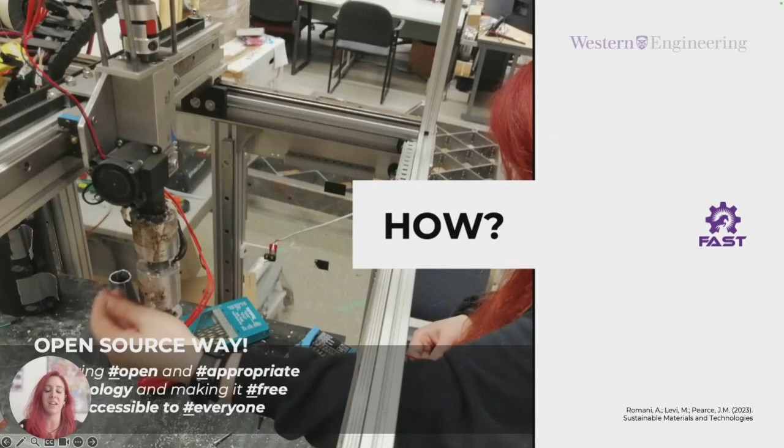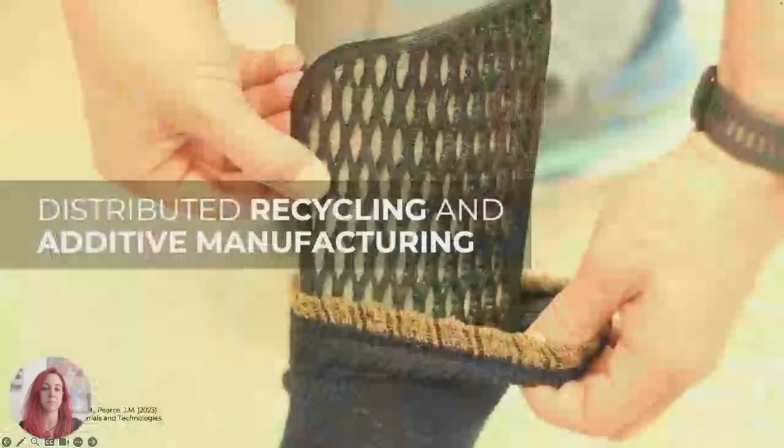But how are we making it possible? In our case, open source is the way. So we are pushing open and appropriate technologies and trying to make it free and accessible to everyone, fostering sustainability at different levels. We are currently involved in projects mostly connected with two main research streams. The first one is distributed recycling and additive manufacturing, which is also my core topic at FastLab. And the second one is focused on enabling sustainable energy and technologies, such as photovoltaics.

In both cases, our focus is to achieve sustainable development goals thanks to accessible technologies, aiming to foster sustainability in real-life contexts. At FastLab, my activities focus on applying open design principles to physical products and studying sustainable materials for accessible product application. All of this thanks to digital fabrication.

You can find us in the Thompson Engineering Building at Western University as part of the Faculty of Engineering, and we are on the main campus in the city of London, Ontario, in Canada. If you want to know more about our work, you can also check our Appropedia page with our projects here.

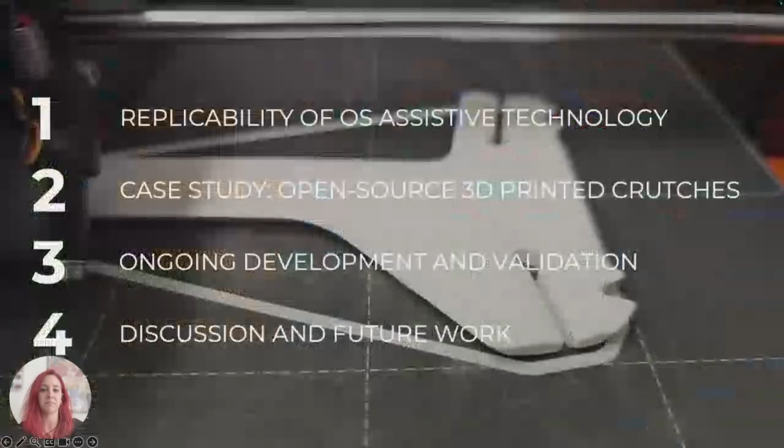Today, I'm going to focus on a specific project connected to the topics of this conference and open source healthcare. First, I will speak about the replicability of open source assistive technology. I will then focus on a case study that we are working on, connected to distributed open source assistive technology products. I will also share some insights from the ongoing development and validation of this project, followed by some key aspects connected to replicability and future work on the projects as well.

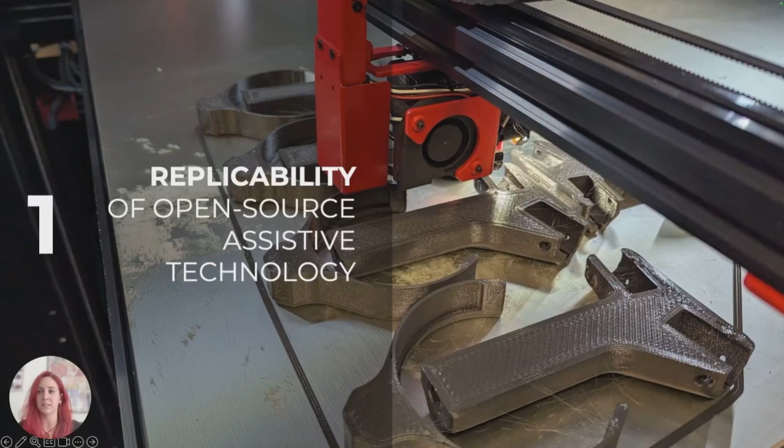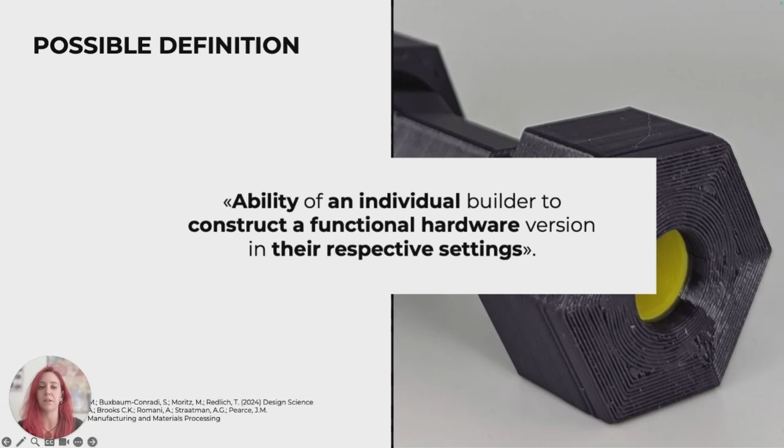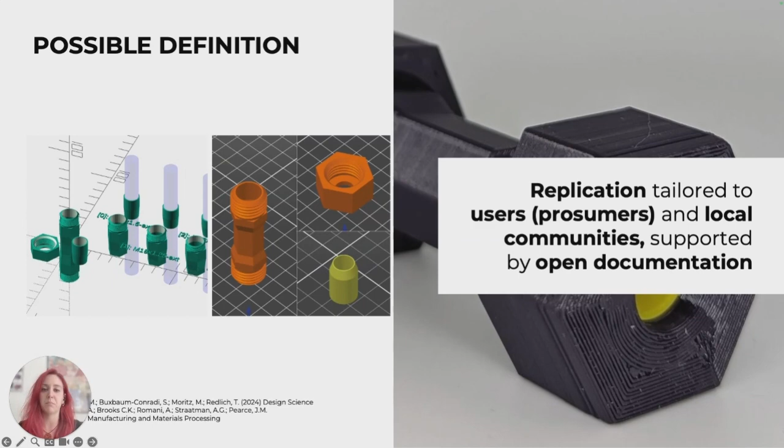Let's start from the replicability of open source assistive technology. But what is replicability in the open hardware context? A possible definition could be the one provided by Omer and colleagues. So replicability is, in this context, the ability of an individual builder to construct a functional hardware version in their respective settings. And this means that the replication should be tailored to users who are prosumers in this case, and local communities as well. And all this process should be supported by open documentation of the designs.

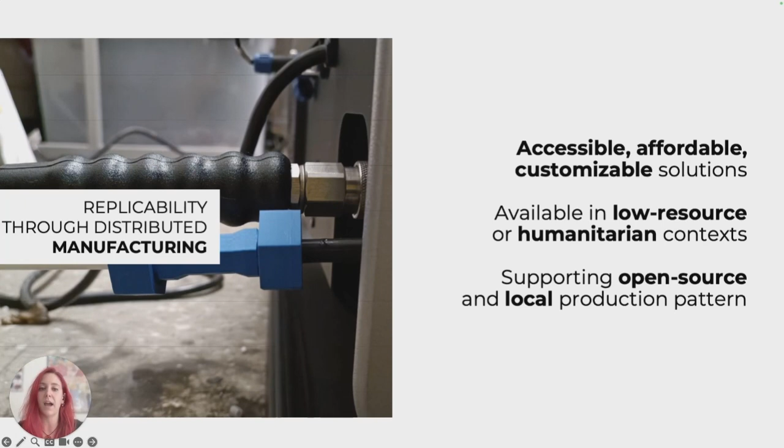Replicability can be achieved thanks to distributed manufacturing because processes such as open source 3D printing allow for more accessible, affordable, and customizable solutions. They can also be available in low resource or humanitarian contexts, for example, having access to a low-cost 3D printer or locally available materials. And all these technologies and materials can support open source local production pattern, producing what is needed and only if needed.

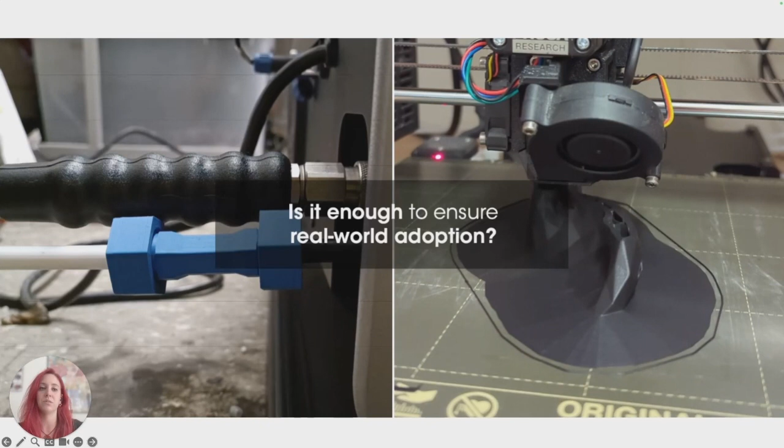Replicability is also fostered by open design principles. Project and documentation for open source products should be available to all users. Those products should also be replicable by using accessible equipment and tools available to users. Finally, the replication of these products should always be possible, together with the adaptation or modification according to specific needs. So the question is mostly if this is enough to ensure real-world adoption.

And I would say no, because open source hardware and products should also consider other factors when reaching users and real-world contexts. For example, easy replicability, quality assessment, or affordable fabrication, and not only the use of open design principles. And here is another big question: what is replicability when applied to the open healthcare context?

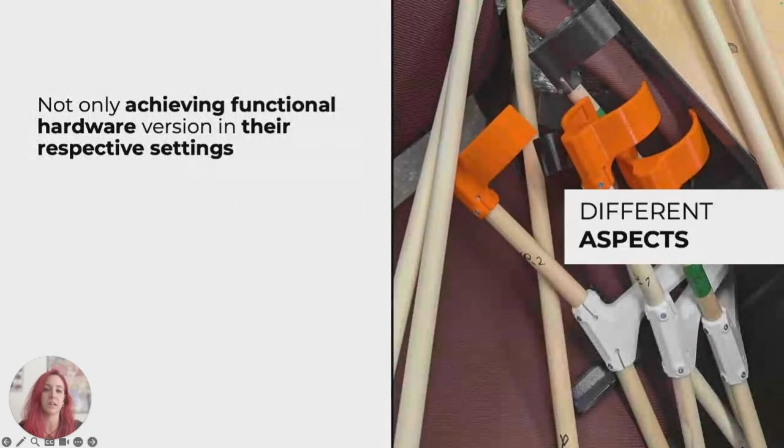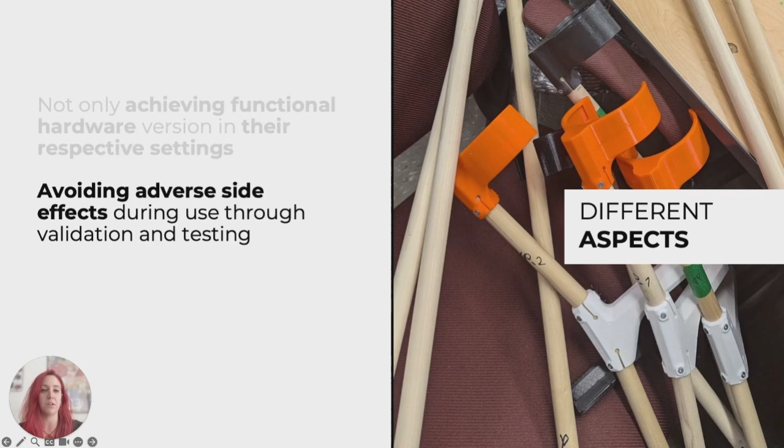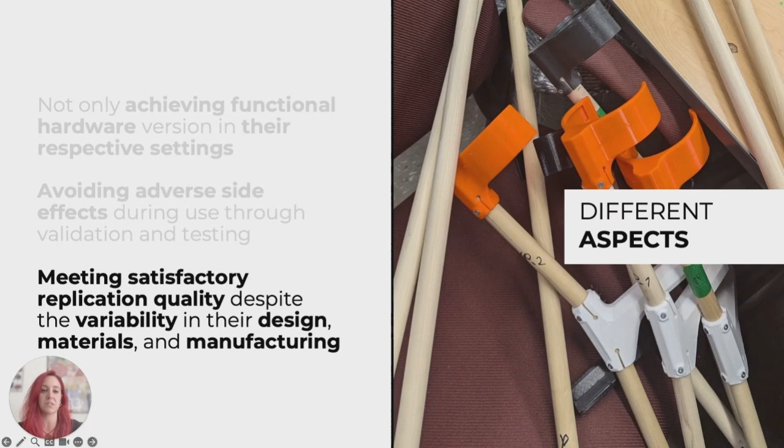This definition might be trickier to define than the previous one, so there are different aspects we should consider. The point is not only achieving functional hardware version in their respective settings, but also avoiding adverse side effects during their use. This can be done through validation and testing of the device and its replicas. We should also meet satisfactory replication despite the variability embedded in distributed open source products, such as modifications in design, variability in local materials, and manufacturing processes. This is also still a topic for real-world adoption of open source assistive devices.

So today's aim is to reflect on the replicability challenges existing in distributed open source assistive technology, and I will do this through an ongoing case study from our lab.

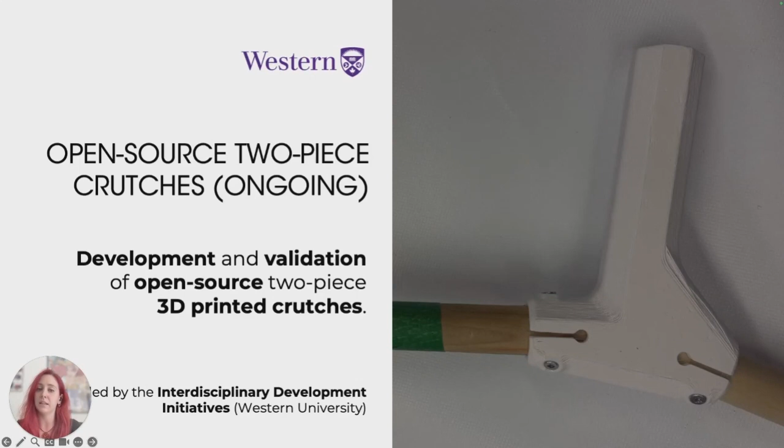This project focuses on the development and validation of a version of 3D printed forearm crutches, funded by the Interdisciplinary Development Initiative at Western University. Our lab is currently working together with other departments and groups at Western, merging each collaborator's expertise and knowledge to foster the real-world application of such an open-source assistive product. I really want to thank them for all the participation and engagement they are showing in this project.

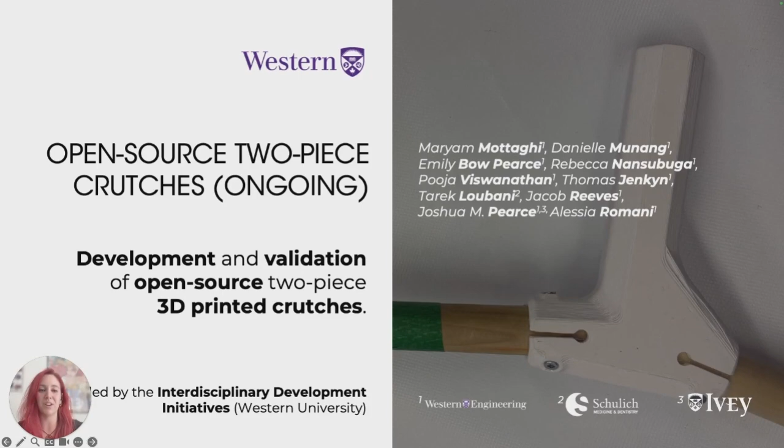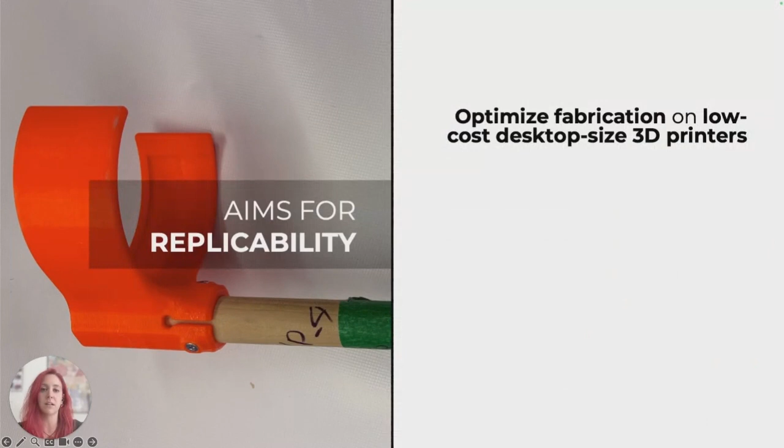What we are aiming for is to develop an open source 2-piece 3D printed crutch that should be replicable in low resource settings and in humanitarian contexts. For this reason, we aim to achieve some replicability goals.

The first is optimizing the fabrication of this product on low-cost desktop-size 3D printers to reach a broader audience of customers. The second is to reduce the need for off-the-shelf parts and make this product less influenced by the availability of such components.

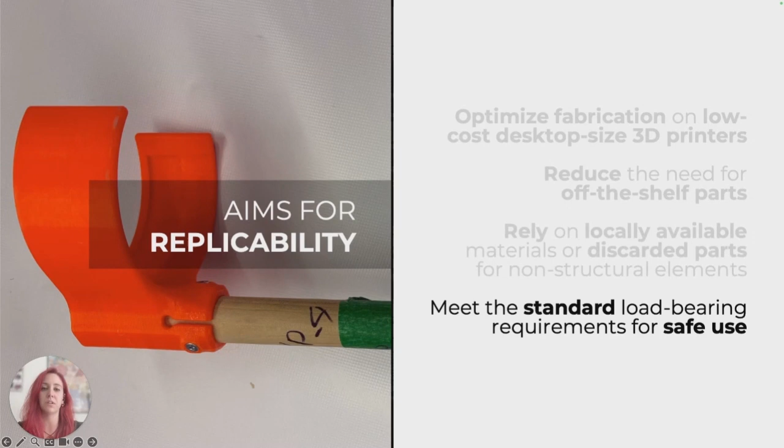The third is trying to rely on locally available materials, or even better if possible, discarded parts for non-structural parts of the product. Finally, we aim to meet the standard load-bearing requirements for safe use of standard crutches, paying attention to safety when the user is using this device.

The development workflow can be divided into different steps. We designed the first version of the crutches during the first design phase, and we optimized its fabrication as a second step, reducing time and material use.

We then tried to study the replicability of these parts by considering different materials and 3D printing setups. We assessed all these different combinations through mechanical tests, which were useful to improve and further modify the design, making it safer and suitable for use.

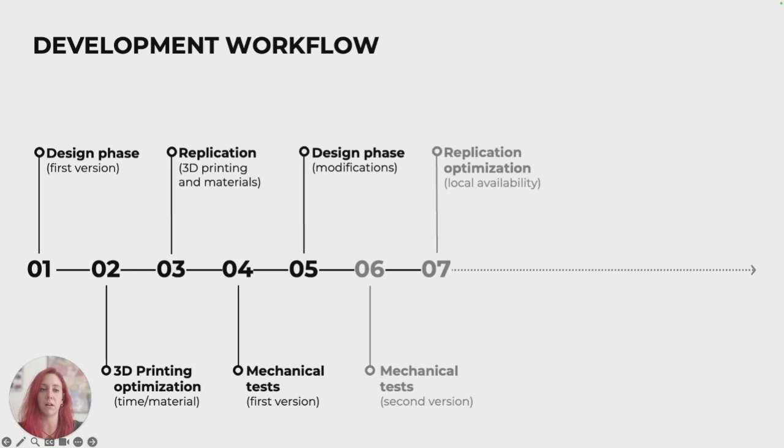Now we are trying to replicate the mechanical tests on this new version, keeping the different combinations of materials and setups, and at the same time, we are working on alternatives to some less available materials or more affordable options.

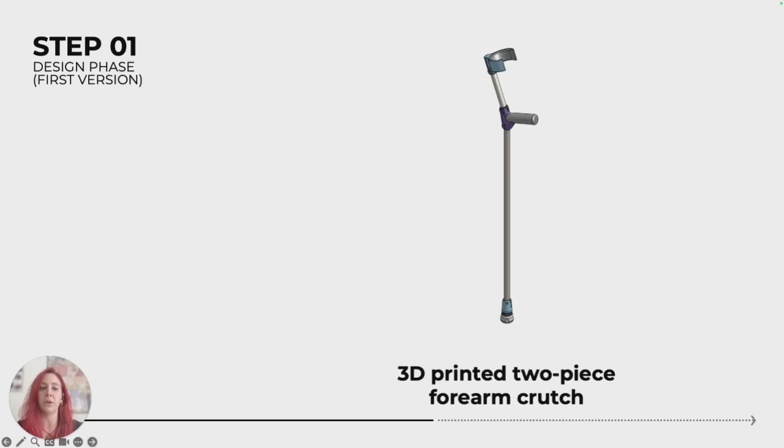Focusing more on the development and validation of the crutches, we are working on a version made of a 2-piece 3D printed forearm upper element, to facilitate the replication of the 3D printed components with low-cost 3D printers. The assembly can be divided into different components using 3D printing for most of the parts, either with rigid or soft materials, and only a few extra off-the-shelf components.

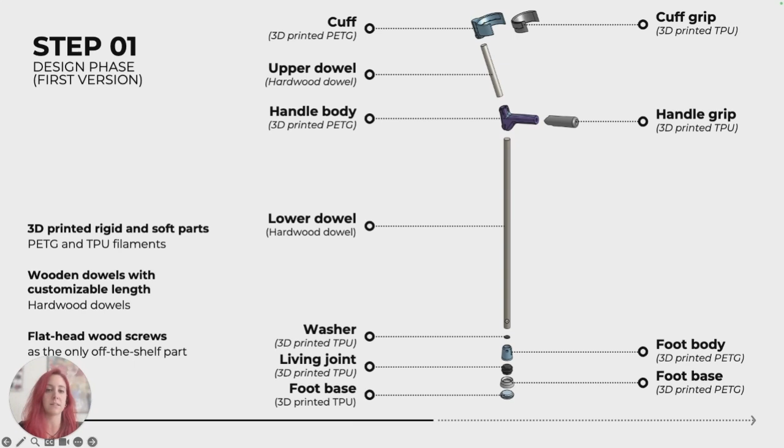We included parts made of PETG and TPU filaments for rigid and soft parts of the product, and then we selected wooden dowels as the main connection parts, allowing for customizable lengths, and added wood screws for the assembly, the off-the-shelf part included in this product.

All the 3D printable parts fit the volume dimensions of desktop-size 3D printers, making the replication easier for users with small format 3D printers and, at the same time, allowing for multiple part 3D printing if using large format systems.

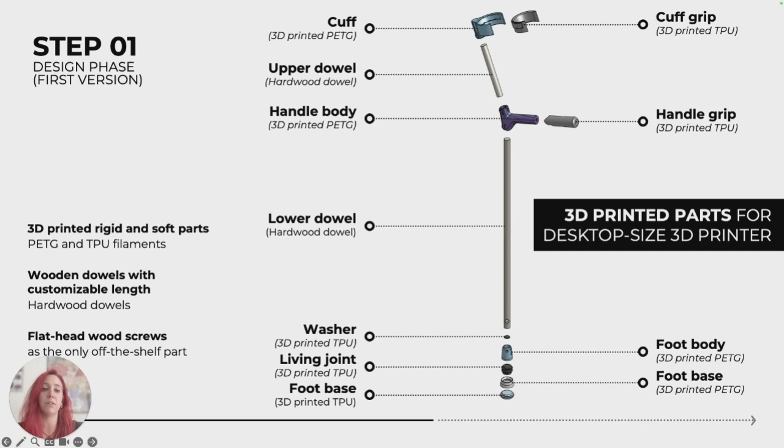The second step was then optimizing the 3D printing settings. What we did was print full solid parts made of PETG to ensure the mechanical requirements we needed for safe use of the crutches. We also considered other aspects during the previous phase, which we checked when printing.

First, we avoided the use of supports thanks to the designed shape and selected building orientation. We also tried to suggest a preferred building orientation through the design shape of the 3D printed component, for instance specific flat base areas or similar aspects, adding a further way to control replicability and guiding the user.

On one hand, this was also useful to reduce the time used for printing the different parts, the material used, and the waste. On the other hand, these choices make the part easier to fabricate by non-expert users.

Then we also tried to work more on the replication aspect connected to the 3D printed parts, and we considered using different materials, filament and qualities, and also different 3D printing formats.

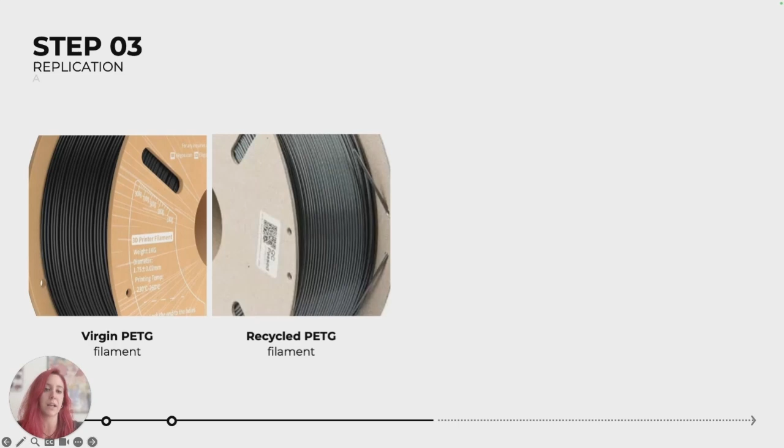What we did was select one material for the structural components, PETG in our case, and print them with both virgin matte filaments and recycled ones. We did this either with small-sized 3D printers, such as Prusa MK3S, and large format 3D printers with building plates suitable for printing multiple parts at the same time.

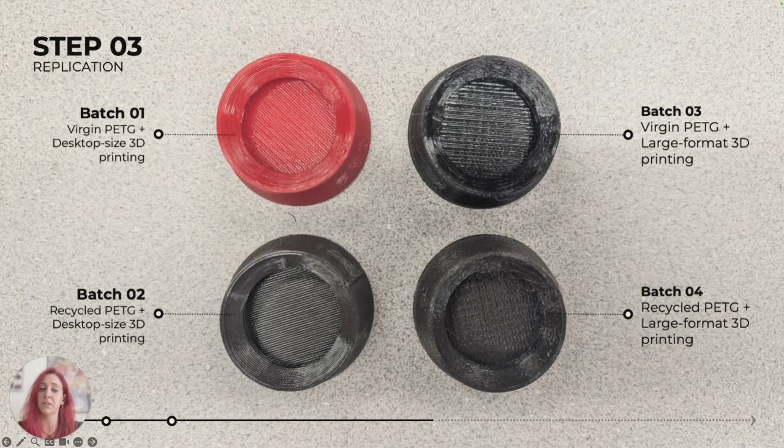These trials resulted in 4 different batches of samples, where batch number 1 uses virgin filament and small-scale 3D printers, batch number 2 switches to recycled PETG, and the other 2 batches focus on large format 3D printers, where batch 3 uses virgin filaments and batch number 4 goes back to recycled ones.

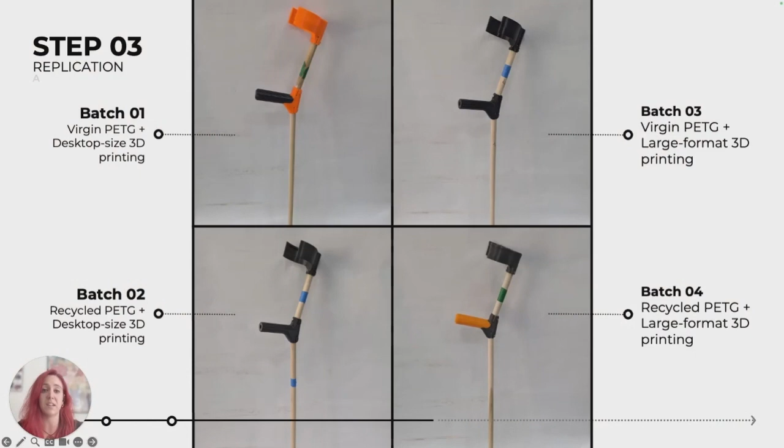These parts also correspond to 4 batches of assembled crutches that we assembled to refine the assembly procedure and perform mechanical tests on this version.

We first referred to the right standard for the test, and we selected the ISO standard available for walking products to be used with one arm.

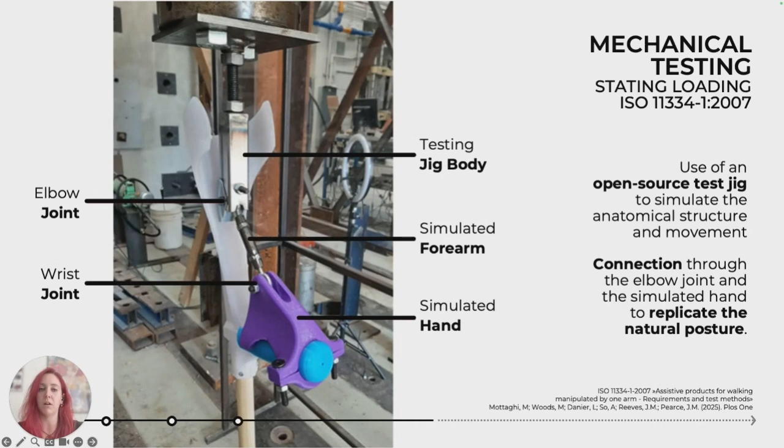We then used a custom setup to simulate the anatomical structure and movement of the arm. This setup was previously developed by our lab in another publication, and we adapted it for our current configuration of the crutches, replicating the natural posture during use thanks to simulated joints of the forearm.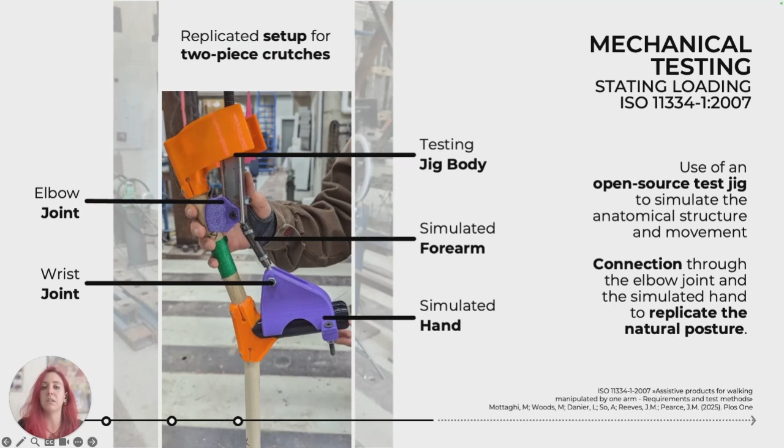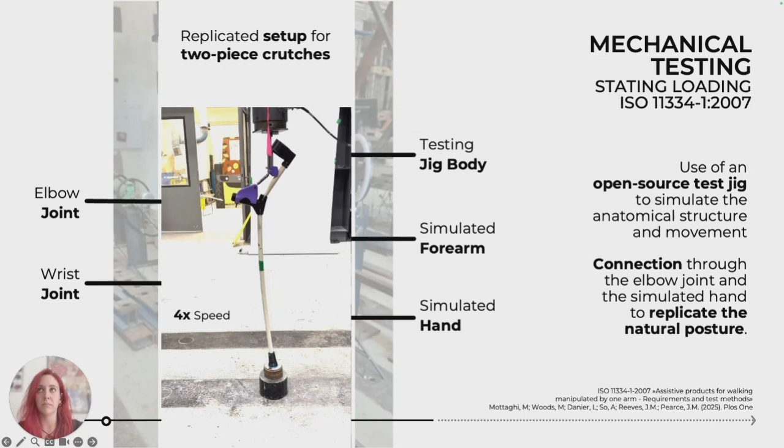We then started to test the applied and increasing load, as you can see from the video. We did it for each of the 4 batches of samples that we have, which means 5 crutches each, so we tested around 20 prototypes in total, trying to reach the maximum load.

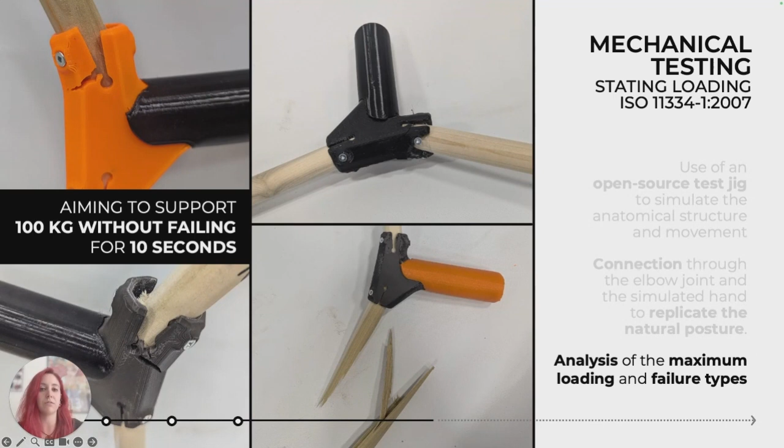Doing this, we also analyzed the maximum load achieved by the different materials and 3D printer combinations and the failure types, which were quite different for each batch, but should ideally meet the standard. So we aim to support 100 kilos without failing for 10 seconds to meet the standard.

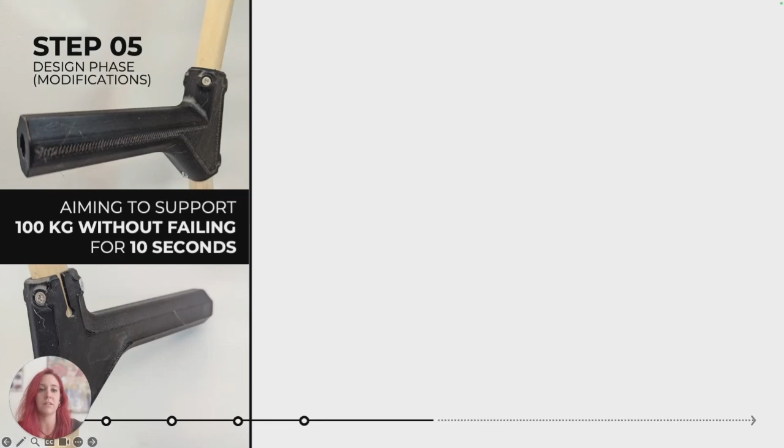These results allow us to make further modifications, which first means modifying and redesigning the critical components leading to failures - in our case, the handle - to achieve the target standard, so 100 kilos without failing for 10 seconds.

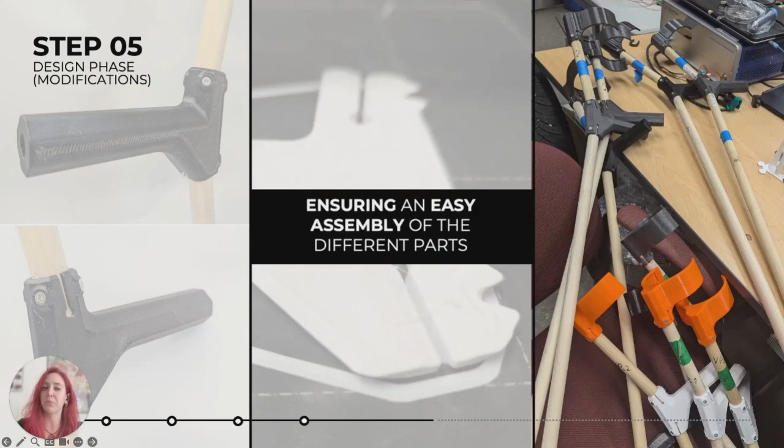We then reprinted the new parts and further tuned the parameters to reduce any inconsistency in the material flow and ensure 100% solid parts. Finally, we reprinted the parts with virgin and recycled materials using both small and large format 3D printers according to the previous batches.

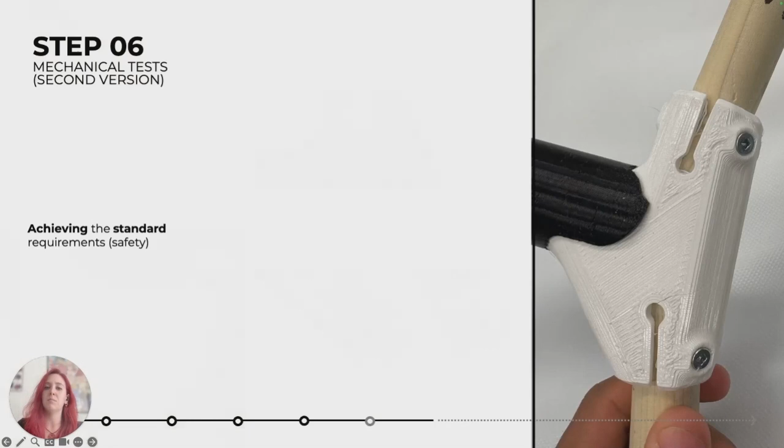We are now doing the mechanical tests on these new prototypes, and they look promising because we are getting to the standard requirements for safety, and the replicability of our part is good because we are observing similar failure modes on the samples, which also highlight some patterns supporting replicability.

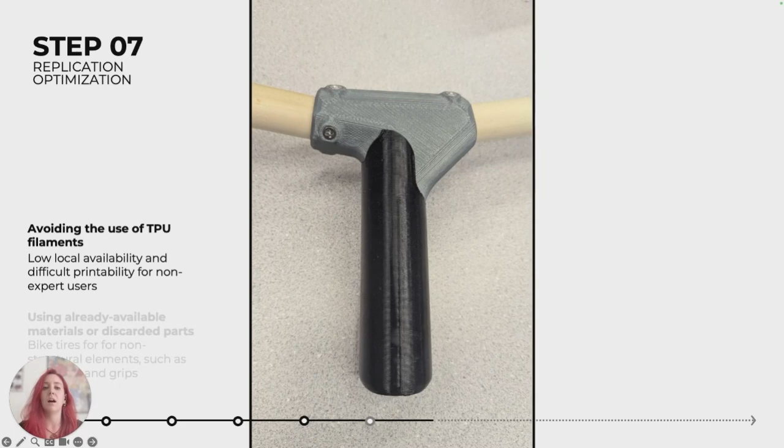We are also working on how to replicate this product in local low resource settings by providing alternatives and redefining our current design. For instance, some ongoing tests aim to avoid the use of TPU filaments, which can be tricky to find in some contexts.

For this reason, we are also considering already available materials or discarded parts for non-structural elements. For instance, we are trying to develop one version using discarded bike tires for the padding and grips, also simplifying the 3D printing process for non-expert users.

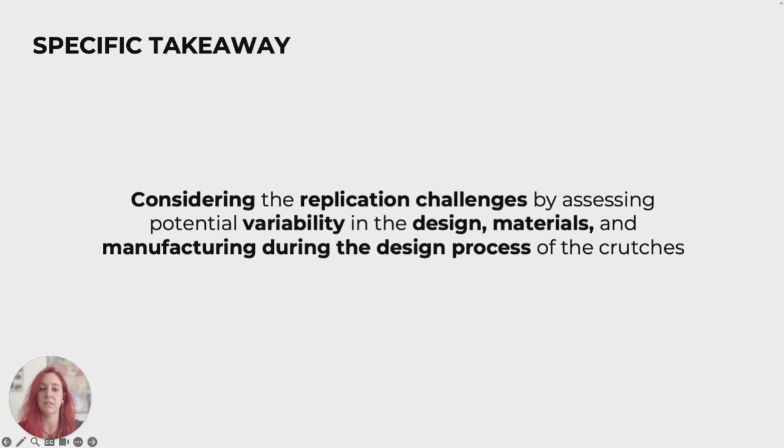As far as now, these ongoing activities have led to an important takeaway about the replication challenges behind open source 3D printed crutches. Such challenges should be considered during the whole design process of the crutches, and for doing this, we should find new ways to assess the variability connected to their distributed application and simulate them during the design process.

This concept can also be extended to the open source healthcare context, leading to the main takeaways of this presentation. Distributed open source assistive technology needs to include replication assessment during the design process, considering potential variability connected to the replication context of the product. This means that we need to design and share specific procedures and methodologies to be included in their development.

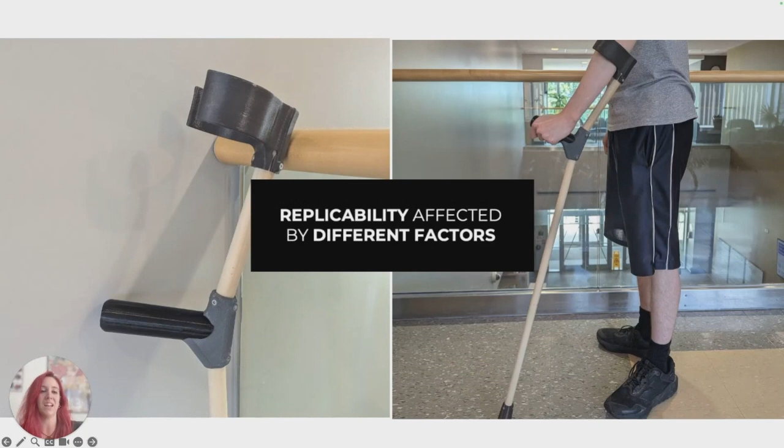Of course, replicability is also affected by different factors. A study from our lab highlights some key aspects that can be seen as a starting point for structured replicability assessment in the context of open healthcare products.

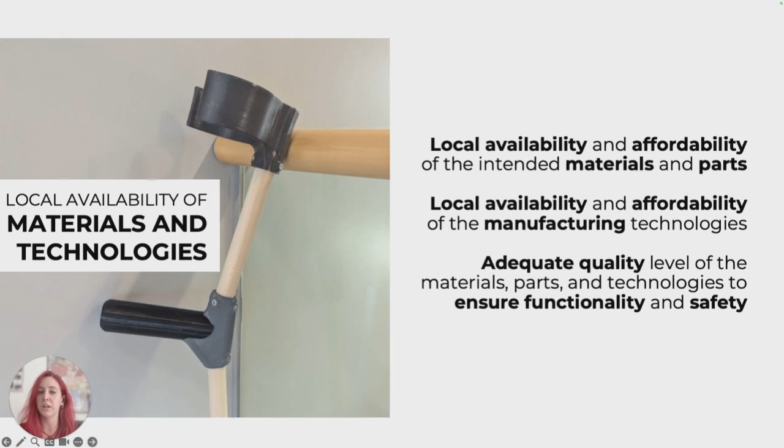Considering materials and technologies, we should consider the local availability and affordability of materials and parts, and the same should be done when choosing manufacturing technologies. In general, the target is an adequate quality level of materials, parts, and technologies to ensure both functionality and, most of all, safety and no side effects during use.

Focusing on designing replicable products, we should rely on available and affordable materials, parts, and technologies as much as possible, designing and keeping in mind possible alternatives without affecting the main function and safety. The extent to which products are designed to be easily replicated guides the whole design process and should consider non-expert users as the main target for replication. This approach can help increase the overall quality of replicas by simplifying their replicability.

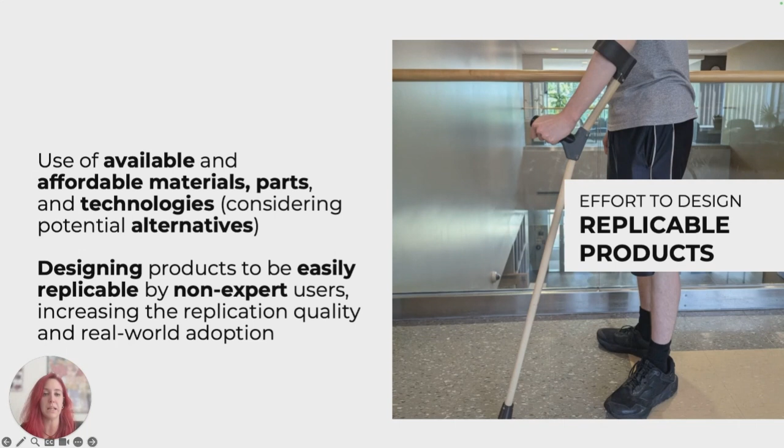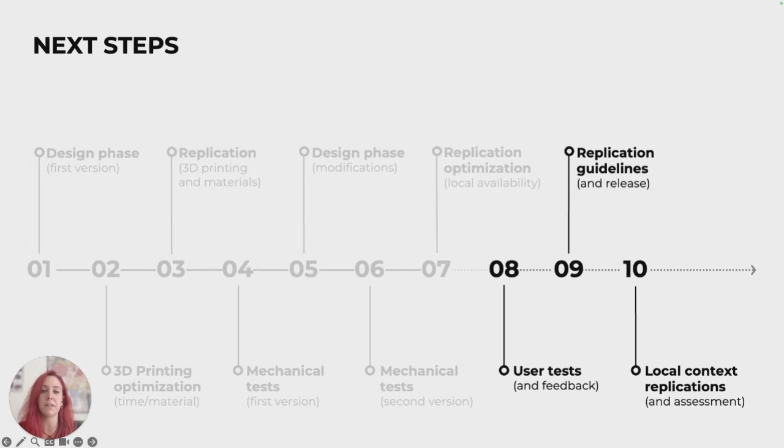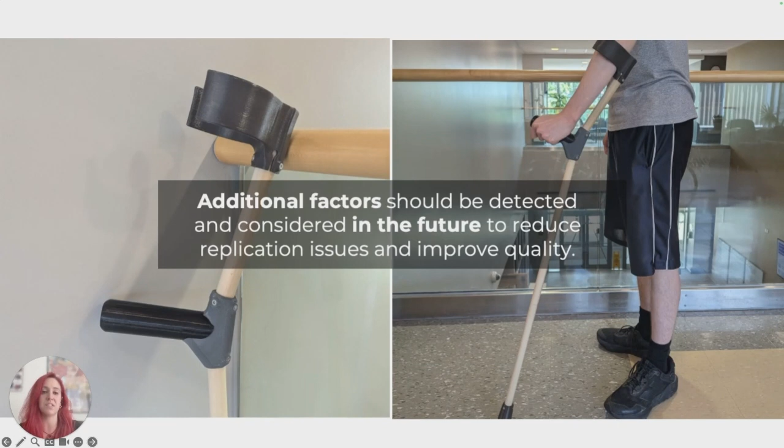Back to the crutches, our next steps will be to conduct user tests, creating detailed replication guidelines to be released, and to support the replication of the crutches in a real-world local context. Finally, additional factors affecting the replicability of distributed assistive technology should be detected and studied in future projects, including how to assess them during product development.

So, what can we do to address replication challenges in distributed assistive technologies? I would say this is an open-ended question that we should address altogether.